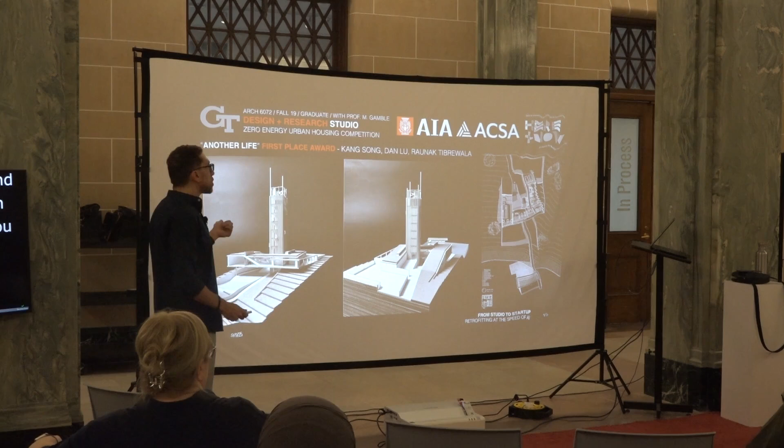But the team that won had a design called Another Life, focusing on the life of a fisherman in Iceland specifically, designing the architecture in such a way that the form responds to the environment, while also thinking about energy. We're doing comparisons for every month between the base case, which is not doing very well in terms of heating, cooling, lighting, and then does a lot better with the design moves. So when you see the architecture with a capital A that is really attractive and wins competitions, you know - because of the simulation tools that students have learned and are using - that this is supposed to, and probably will, perform.

The way I typically approach this in teaching is that in the basic building science courses, I teach students simulation tools that we use in research so that they're able to compare base cases with design cases to understand the impact of every decision, and also embed this in ways to empower and inform marginalized communities.

This is the Dubai Travel Option Studio. This was one of the best experiences in studio teaching in general.

Michael will recall that there was funding that allowed the students to travel to Dubai, and we interacted with multiple practices, learned a lot about the architecture of the desert.

The very interesting thing is, I didn't know this at the time, the studio was called Sustainable Startups in the Desert. I didn't know I had an interest in startups ever since then, so it will be interesting to show you how the startup is performing later.

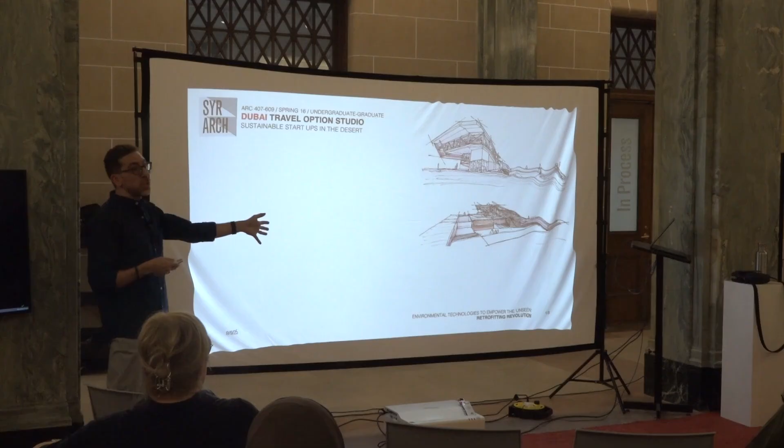As you know, Syracuse University students are amazing in terms of visualization, representation, articulation of architecture, and going through all of the design thinking that translates into impactful visuals and impactful design decisions.

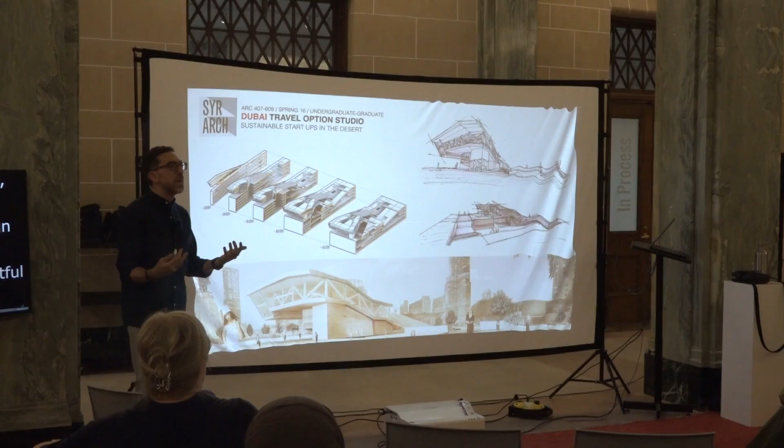What my role is in such design setups is to empower students by using visualization tools to represent environmental design, specifically daylighting design, for example for the before case, where they were building a building underground to use the terrain and underground energy sources in the desert environment.

And then there's no daylighting happening here. So what they did, like slits, atria, courtyards, all of the moves to increase the daylighting performance, showcasing the before and after of that.

So I'll bring this to the second topic together with building science, which is community analytics. And that ties very well to the research goals that I typically lead.

I would love to transform climate responsive design decisions to advance both racially and socially just solutions, develop and deploy novel robotic, sensing, simulation, and AI technologies to address the climate crisis.

Very important for me is to establish impactful collaborations. I never want to work in silos. I always want to work with government, industry, and academic partners, because in order to see impact, you have to be building relationships with those decision makers as well as those who are experiencing the research decisions that we are making.

So I did my Ph.D. at MIT, and this is the urban modeling tool called UMI. It's still active until today.

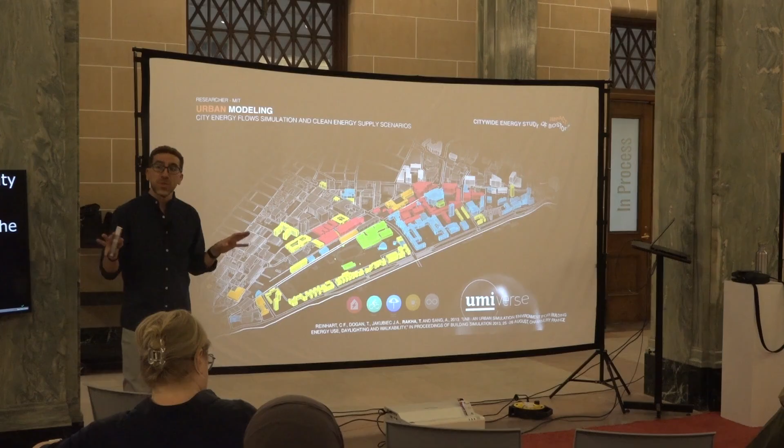I was focused on the walkability and thermal comfort of outdoor spaces, but this is the citywide energy study of Boston for the part of the MIT campus represented here, to see the energy flows of campuses and multiple buildings, and how we can understand design decision processes at that scale.

So this project is called Community Energy, Technical and Social Challenges and Integrative Solutions. And of course, this was a collaboration with Bess. I'm sorry, Bess, this is not my design, but the screen is not doing your picture a favor.

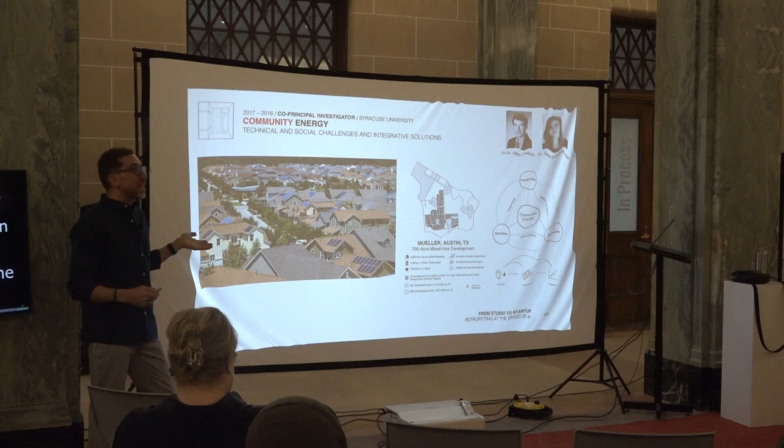We worked with a community called Mueller in Austin, Texas. This is an affluent community that installed renewable energy, had high performance glazing, and really well-oriented buildings, etc. They had a great interest in how their energy performance and carbon emissions are.

We were funded by the National Science Foundation, and we worked with partners like Pecan Street, who I'm still working with until today, partnered with the Syracuse Center of Excellence, etc., to understand the energy flows of that community and how we can help them in making decisions.

In terms of how that looked like from an energy modeling perspective, this is what's called an urban building energy model. It's a representation of the energy flows across 300 buildings.

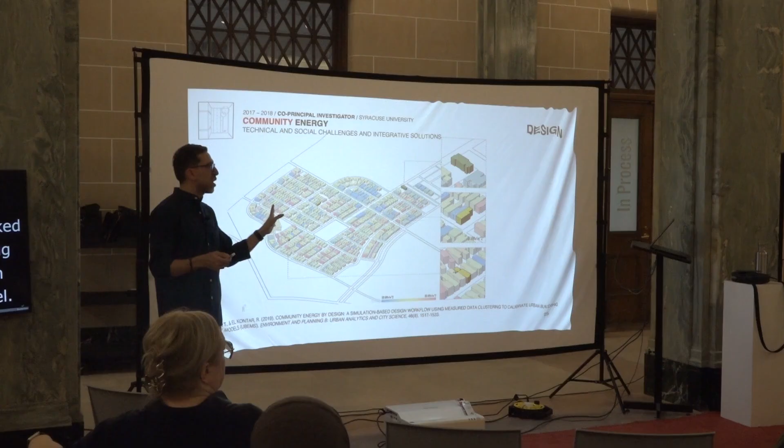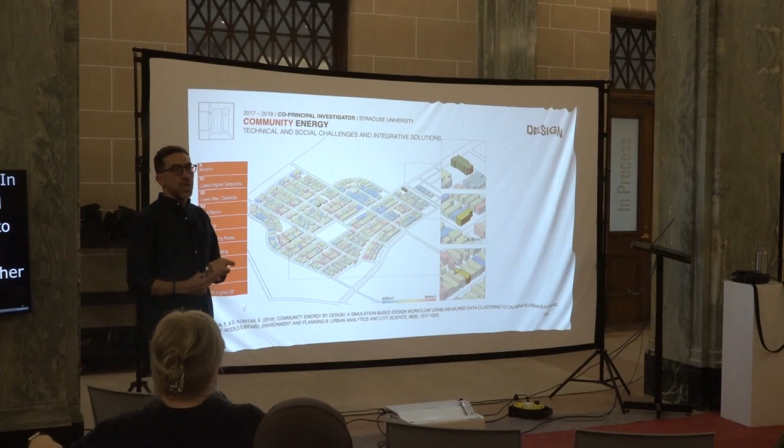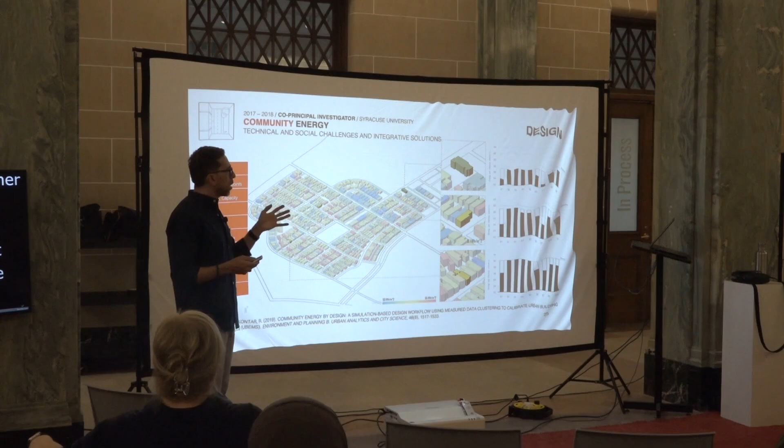In terms of design, basically all of the moves that you can do to perform better from an energy efficiency perspective, whether it is using daylighting, changing the settings for HVAC, changing not just the set points but also the equipment power, etc., using natural ventilation, and comparing the performance of the existing case of the buildings and seeing how these decisions can lower the impact on an energy use perspective, which is great for a community that is attuned with what their energy goals are and how they want to be much more sustainable.

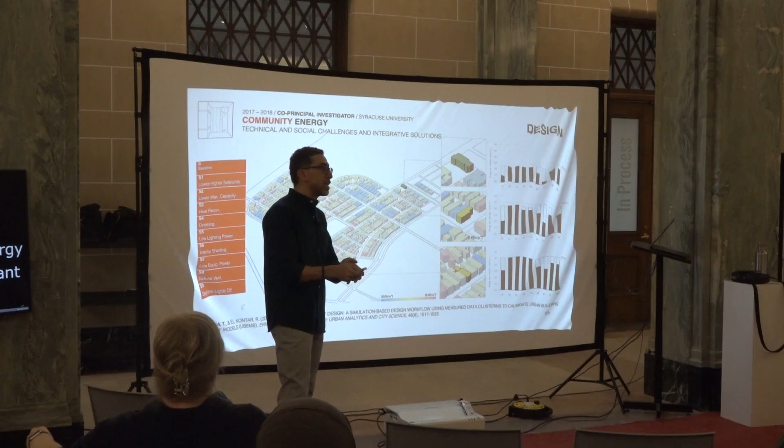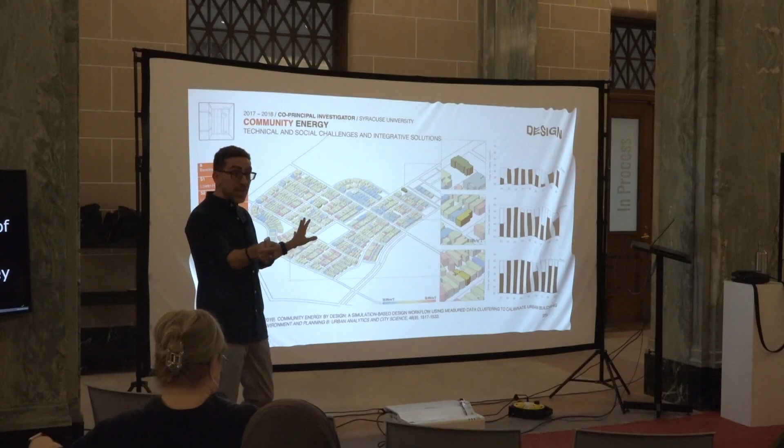But here's the catch. I've been talking about marginalized communities, and this is not an example of that. This is actually a very easy example, because they want all of their buildings to have sensors. They want to understand at the circuit level what is the fridge performing like.

And so this is where another research question came through, which is fairly straightforward: what if we are in a community that we can't measure? And what are we not seeing when we can't measure data?

I was really motivated by the Black Lives Matter movement and the murder of George Floyd at the time to think about inclusivity when it comes to building physics and building science in general. I'd like to showcase the work we've been doing specifically working with frontline communities, because such communities have less likelihood of having available data, limited resources to generate and maintain data, and challenges in data collection, communication, and priorities.

I worked with one of our students at Georgia Tech on an unfunded project called Underrepresentation Challenges in Urban Building Energy Modeling, where we defined archetypical inputs for urban-scale understanding from the US Census Bureau, the American Housing Survey, residential energy consumption surveys, etc. How can we scrape the data we have access to and collect our own as well?

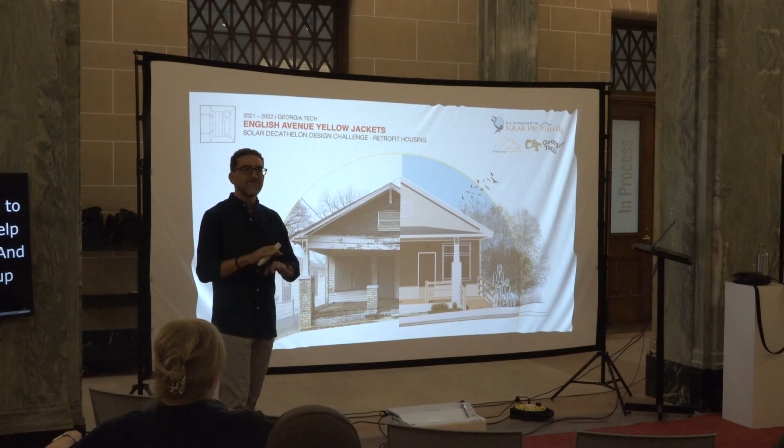Three students came to me and asked if I could help them lead the project, and I said no, because I was up for tenure. Bess will know—I was up for tenure and I was like, nope, can't do that, have to focus on papers. Then they said 'please,' and I said okay. When they won the competition, it really justified everything.

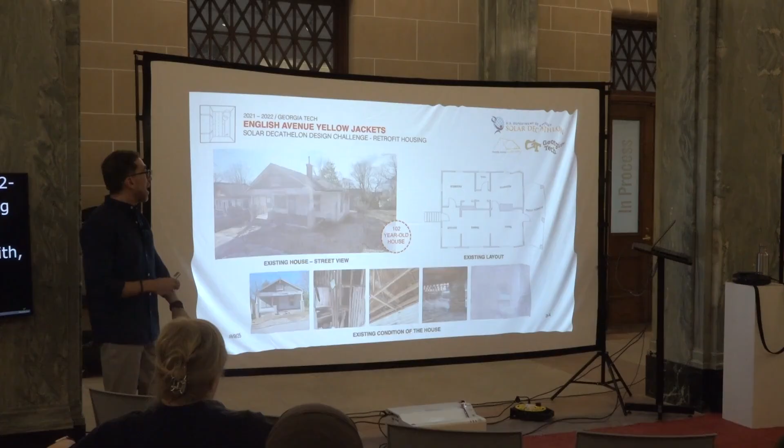This is a 102-year-old home existing in Atlanta that the students surveyed, worked closely with, and understood all the challenges and the really unfortunate condition it's in. They devised an approach for learning from the community members themselves what the situation is. There's no audio here—I'm just showing you that they interviewed the community.

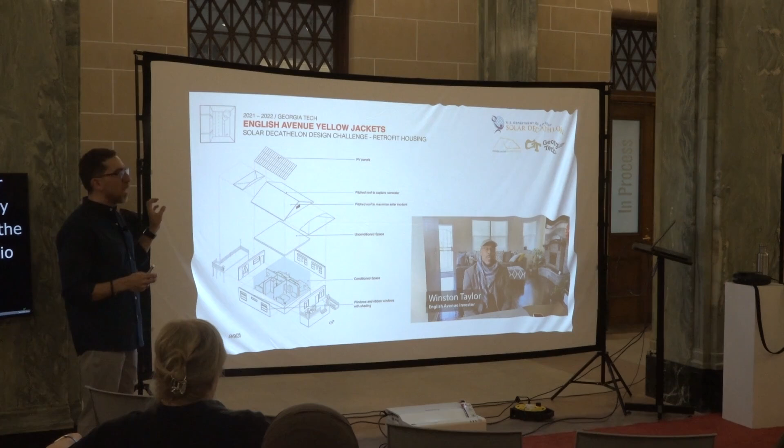And designed a roof that is loaded with all of the tools for resiliency, whether it is rainwater collection or the tilt for PVs, etc.

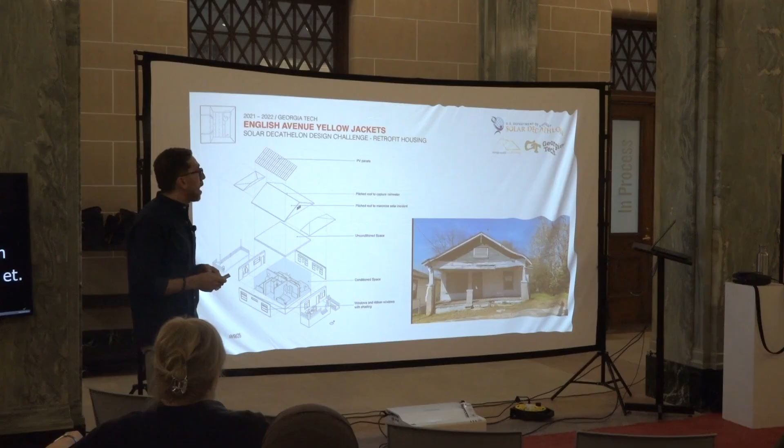And so the impact of this is that we made a model for retrofitting that is based on the means of upward mobility of an underserved community. You can take a derelict building and upgrade it in such a way that it becomes the means of prosperity if we are putting in enough of the sustainability techniques and aspects and technologies.

Okay, I'll go to outdoor thermal comfort because it's very relevant to Syracuse. This is the topic that I was focusing on my PhD. This was towards comfortable and walkable cities, which were 4 years of significant impact on my life.

I was depressed. I came to Syracuse overweight. I used to look very differently, but the PhD has that impact on you, and I'm so glad that I went through it, but I wouldn't do it that way again, to be honest.

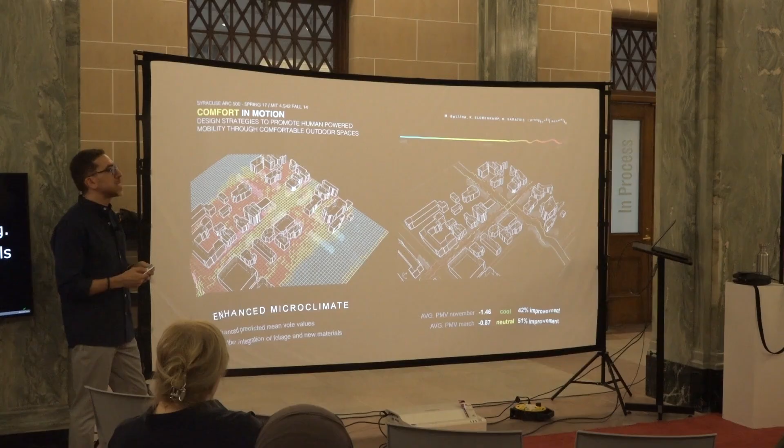However, the first project I ever got funding for, and Michael will remember this as well, is called Fast Syracuse, which was funded by NYSERDA and the New York State Department of Transportation. I applied for funding with the Syracuse Center of Excellence, and we got selected for the funding before I joined Syracuse University, so it was a great beginning.

And through it, applied all of the things I've learned to develop these spatially resolved thermal comfort maps so that you're able to identify where to place a coffee shop, how do you place a bicycle track, all of these decisions when it comes to the urban scale as it relates to comfort.

And I know what you're thinking, where are the frontline communities here? I actually did focus groups at the local YMCA, and I learned a lot when I'm showing European standard bicycling design, and the reaction to that was, this is communism, this is not us. And it's very interesting to see the American perspective on sustainable mobility versus driving a car. There's a lot to learn there.

Okay. Finally, this is my personal topic of passion and everything that is who I am right now, the hill I will die on, which is aerial diagnostics, the use of drones in building performance inspection.

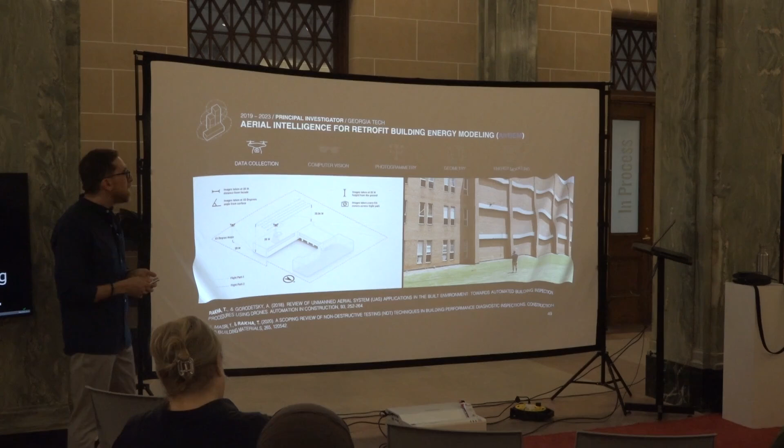Basically, we collect data by traversing building envelope components systematically, and we're collecting data in 2 types. Regular RGB images allow us to identify things like windows and walls and where the roof is. The AI is trained on thousands of images that know that this is a window. That is a trivial problem. It's really not that difficult to have an AI identify a window.

Where it becomes really problematic, very difficult, is to identify on thermal images where issues are with the built environment. I will explain this in a moment.

This is a typical thermal image. A thermal image will show you the thermal performance of the building enclosure. It can show you that there is leakage of air, leakage of heat, or that there is water intruding into the surface. In order to be able to read this, you need to have a building science background.

And so if you ask anyone, where is a problem here, they will tell you there is a hot spot or a cold spot. They won't really tell you what the performance issue is. And that was the project.

We basically sat down and defined what issues we can identify from both the RGB images and the infrared images. This is a case, for example, right here: you can tell that there's something happening right underneath the window. And because it is under the window, this is most likely air that is leaking in or out. Could be infiltration, could be exfiltration.

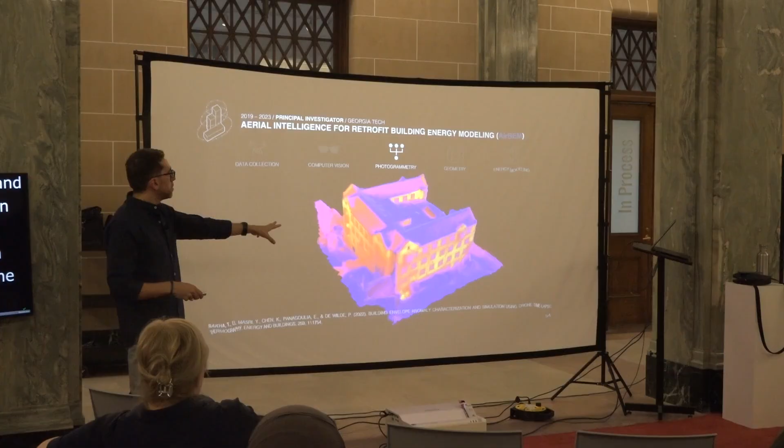So we trained models on thousands of images to detect these issues and then map them onto 3D models. This is a building at the Georgia Tech campus where we are showing the model, but also what is called 4D representation of thermography, if we're taking a series of time images. This is where we're able to identify on the 3D thermography where infiltration, exfiltration is, or where thermal bridging is, or where water intrusion, or cracks, or all of these issues autonomously.

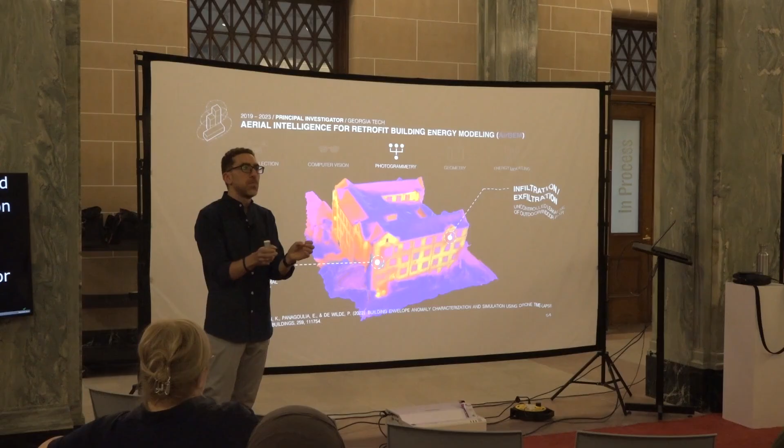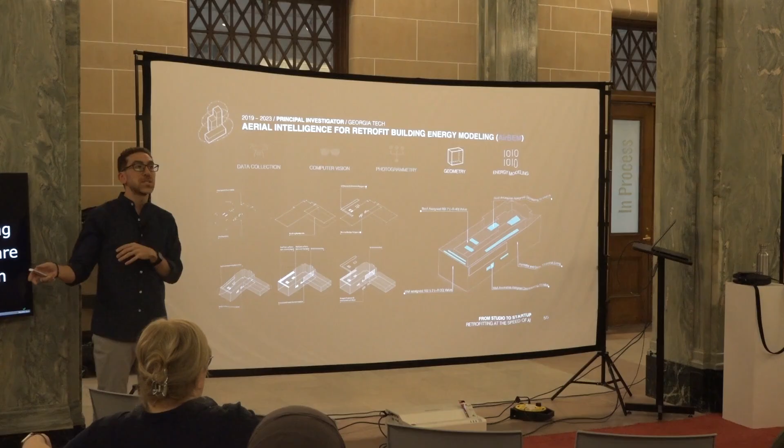And that is key. Basically, the computer vision, or the AI, is allowing us to tell where the issues are based on the training. And then we translate this geometrically into simulation models that allow you to know the impact of any decision you will make on the building enclosure. In that sense, we pioneered the field of aerial building envelope diagnostics.

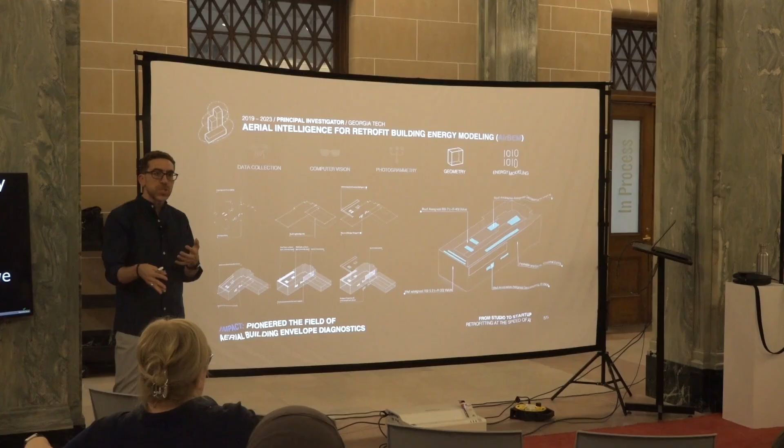And of course, it became very interesting to pursue this further. But I know what you're thinking: where are marginalized communities from that?

We took the drones to Grove Park and other communities, because the data we were collecting and labeling wasn't inclusive of frontline communities. We actually had to collect data in African American communities and label them so that the images aren't just biased towards standard construction, but also show severely derelict building performance.

And we went also to their middle school, the John Lewis Invictus Academy. They came to us and we went to them to show them what thermography and these technologies can be, to help in their career decisions.

So I'm going to now show you what this kind of research led to for the creation of a startup. That is the reason why I'm actually back in Syracuse. The first thing, I got this Regent's Innovator title, and they gave me a 3-year leave of absence that is extendable to 6. And the first thing I did was come back to Syracuse. So that tells you how much I like being here.

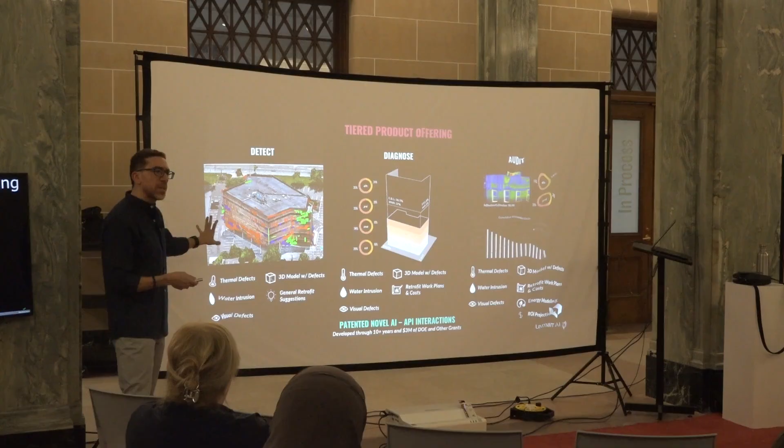We approach different opportunities differently, and this is the representation of it. In Lamarr Detect, you get a 3D model with the anomalies mapped onto it. With Diagnose, you get the retrofit work plans and costs. And with Audit, you get the energy simulation and the return on investment.

The solutions are built for 2 cases. With existing buildings, it's compliance and ESG, retrofit planning and ROI analysis, and pre-acquisition due diligence. If someone is acquiring new buildings, we can help them assess how these buildings are performing before they occupy them. But very interestingly, there's also new construction.

We're able to help buildings currently under various stages of construction verify how they came together. In the UAE, for example, we come after water testing, where they put water on the roof to see if it's leaking, and we do a thermal scan after that to see if the water actually got retained in the roof or anything like that. So we're able to help with new construction as well.

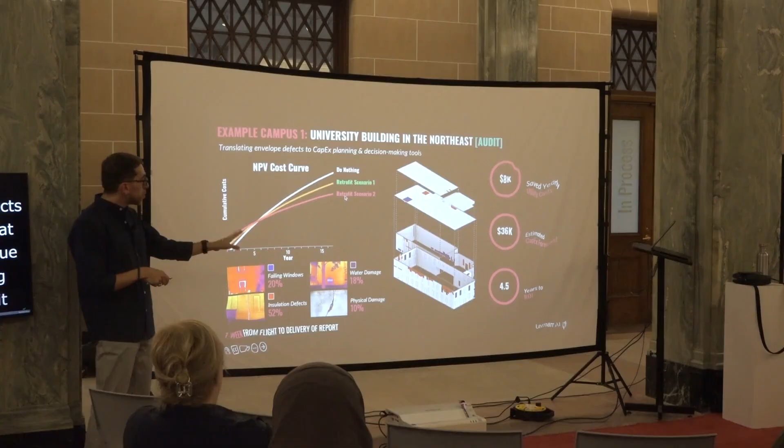I'll show you some examples so you get to see how this works. This is a university building where we're translating these envelope defects into decisions. This is what's called the net present value cost curve, comparing doing nothing versus retrofit scenarios. We're enumerating the number of failing windows, water damage, insulation defects, and physical damage, and mapping this onto the 3D model, so you can see where everything is and make decisions on it. And then we give metrics for savings and return on investment, etc.

Because we're a building science founding team, our recommendations through the AI are surgical. This is a historic building - we don't just say add insulation, it's historic mortar repointing, because this is where we are here. This is water damage and how to address it.

This is a university in the UK where the facilities manager knew they needed to replace the roof, but didn't have the means to communicate this to their executives. So we were hired to do the roof inspection and the building as well. Because the roof is reaching 15% water damage, that immediately makes it viable for a roof replacement.

Finally, this is our first customer ever - a building portfolio assessment in Tampa, Florida. These are 12 buildings they were about to acquire. We were able to tell them your worst performers are these 3 buildings, because they have the highest thermal anomalies as compared to the HVAC impact. So if you're focusing on fixing buildings, these are going to be your high priority.

Before I close, I want to introduce the team that you saw already in the research. Everyone who worked on the research from the leadership perspective got to enjoy commercializing this work. Norhan, who was a postdoc, is now the CPO. John, who was a co-PI, is now the Chief Strategy Officer. Senem is our CTO. And Ben - this is a terrible picture of him - but he did the strategy and business development.